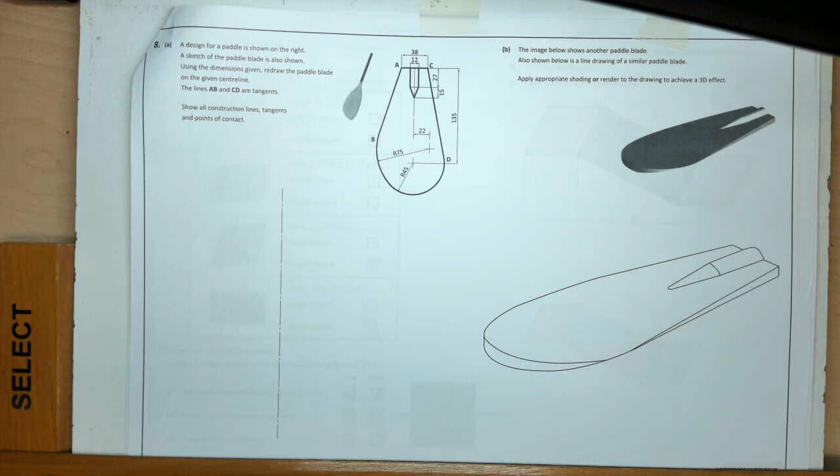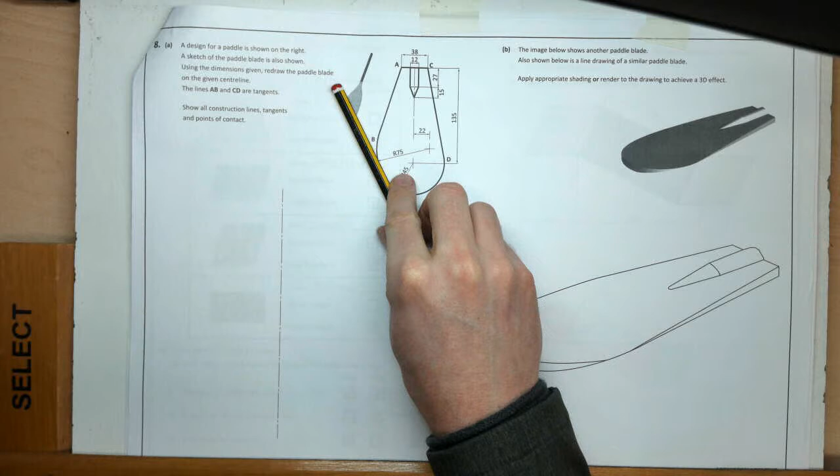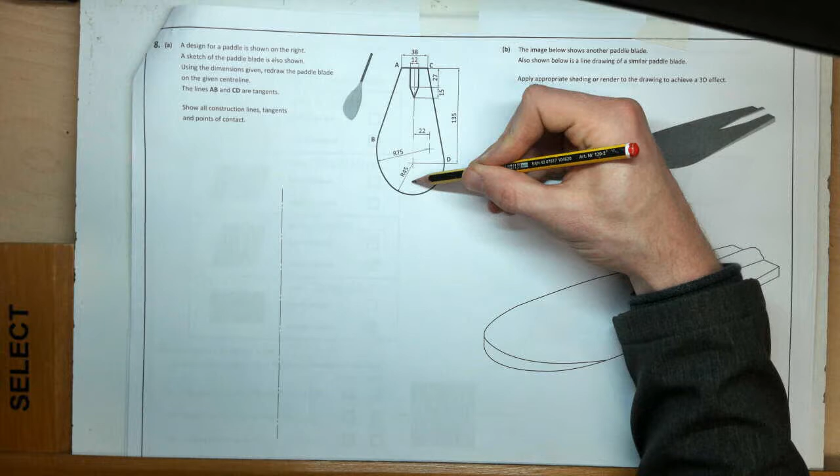Use the dimensions given and redraw the paddle blade given the center line. So here's the center line, running down along the middle here. I haven't drawn it fully there, but that's it running down along the middle. I'll just zoom in so we can go through this question together.

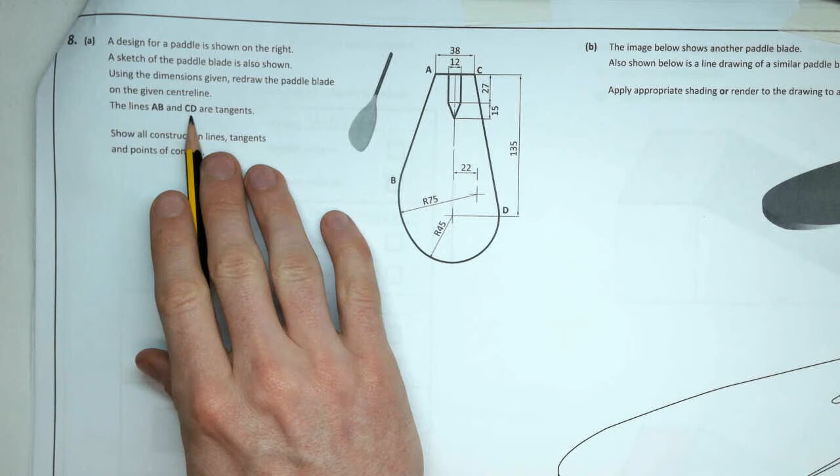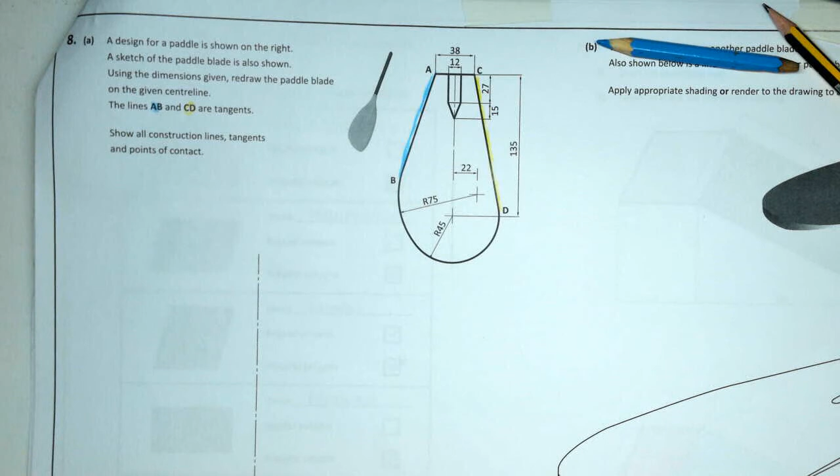Okay, and the lines A, B, and C, D are tangents. I like to highlight these. So A, B, here's A, B, that is a tangent, and C, D is also a tangent. So I'm going to need to do a construction for that. Show all construction lines, tangents, and points of contact. So what I like to do with these questions is draw everything I can, particularly with the centers of the circles, and they always are a great start. And then any constructions I can do after.

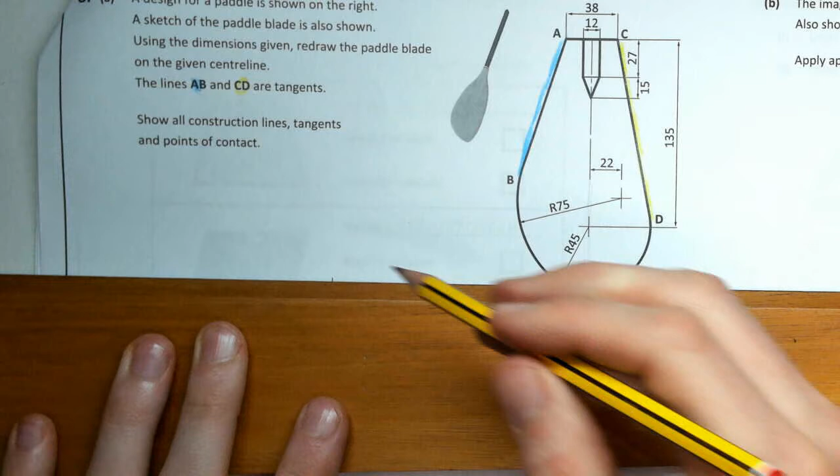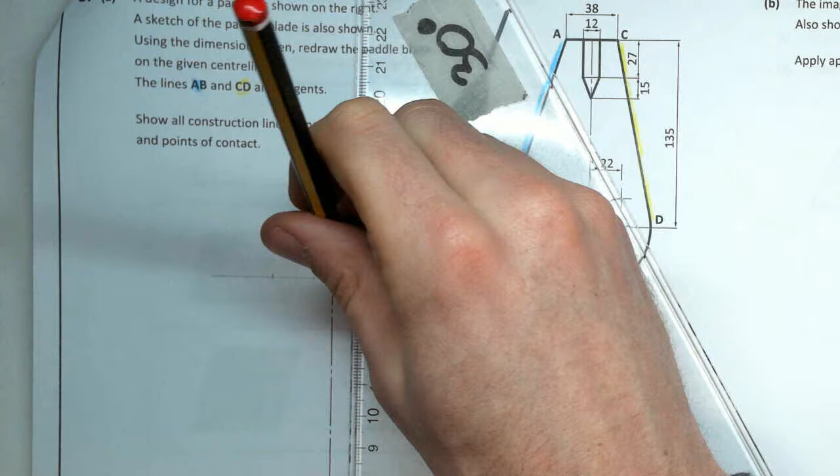So starting here at the top, let me zoom in a bit. I'm just going to draw the top part here. I've got my measurements 12, so 6 on either side, and 38, which is going to be 19 on either side. And I can project that down, so that's going to be a little center bit, and draw this edge heavy. And here's A, and here's C.

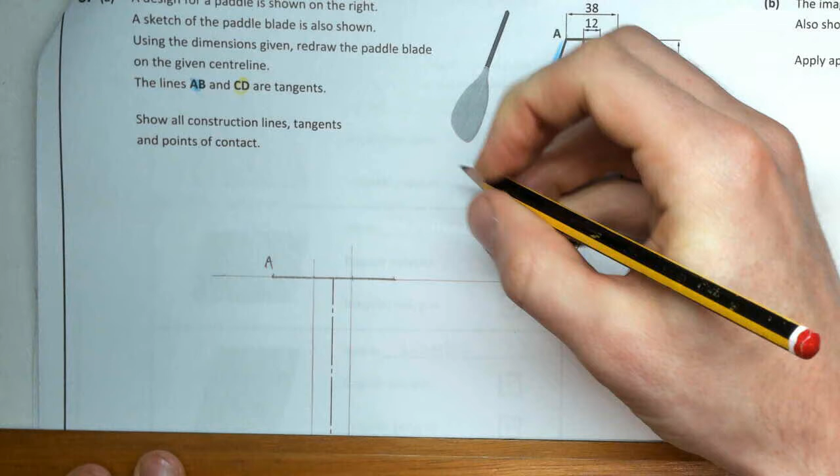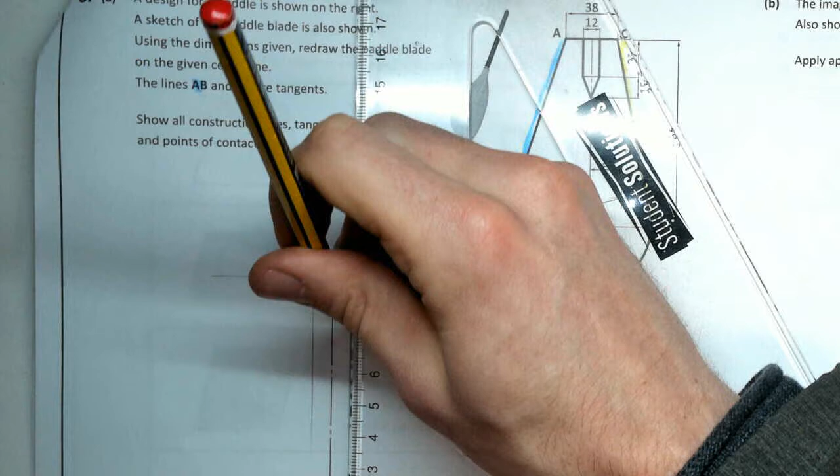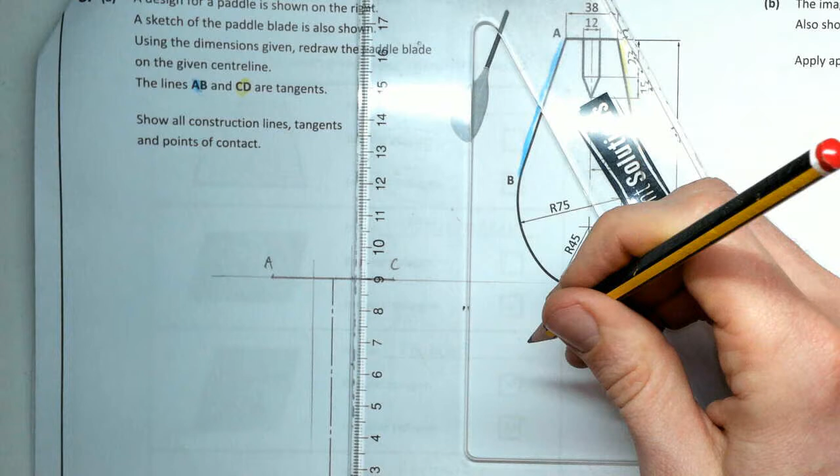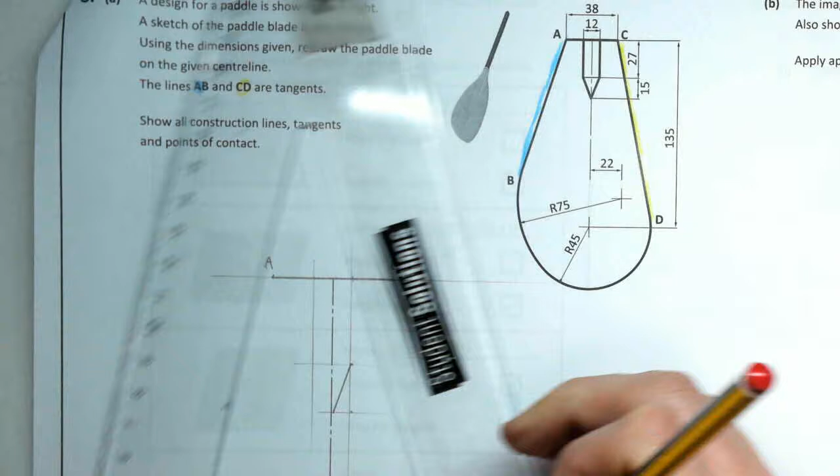Okay, so then I come down 27, 15, and that will allow me to draw that shape, 27, and 15. Okay, so just heavy in the lines that need to be heavy.

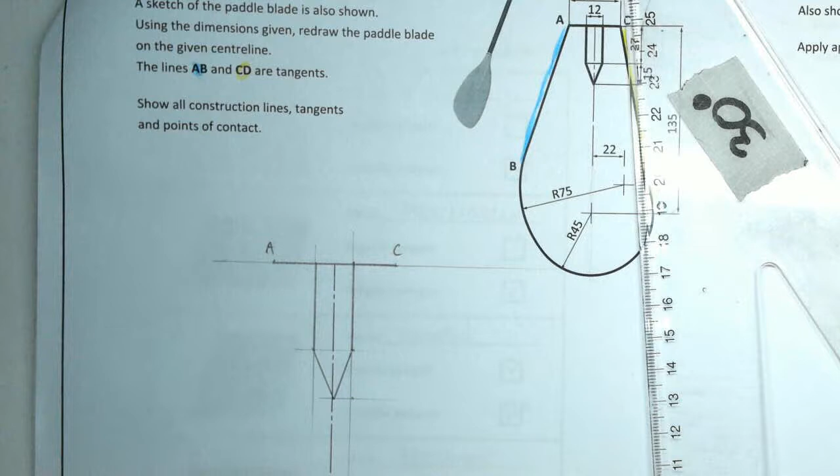Alright, and then we'll measure down our 135 to find our center of that radius 45. I'll zoom out here again so you can see everything I'm doing. So 135. That is radius 45.

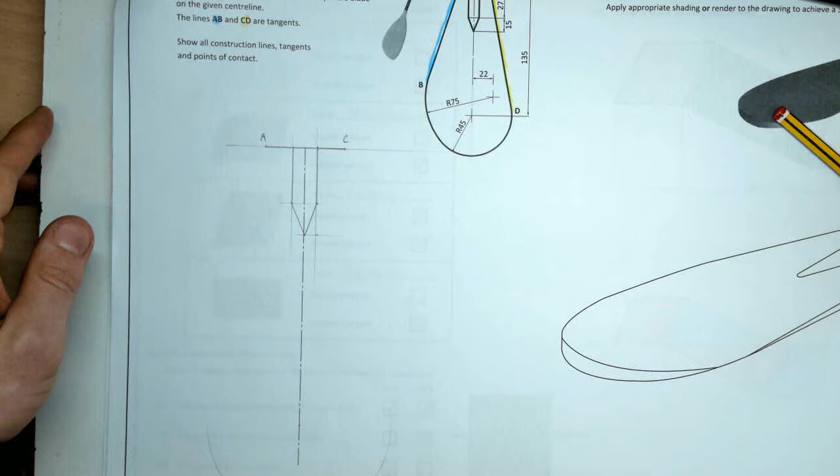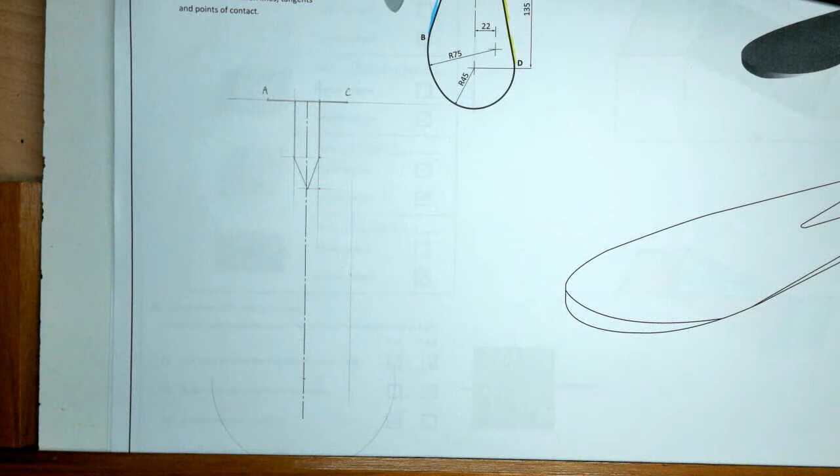Okay, and we've also got this out 22, radius 75. I'll just measure out to 22 first. So it's going to be somewhere along here. So they're not very clear in the drawing here, but this arc runs, I would say, that full length there, runs around like that there.

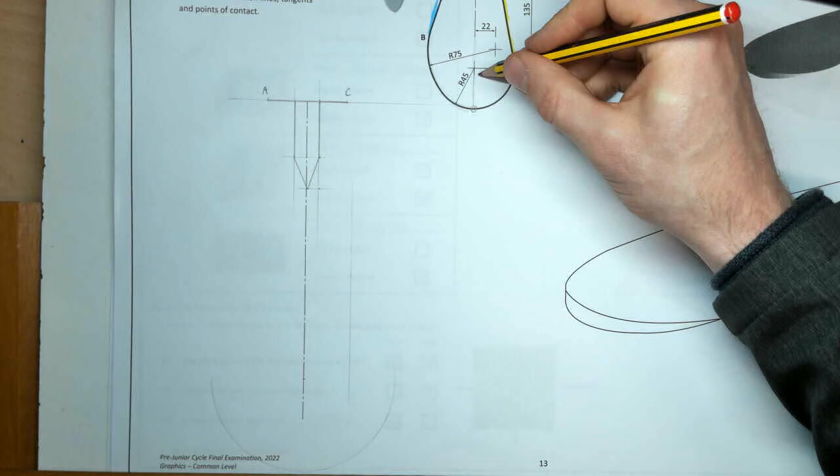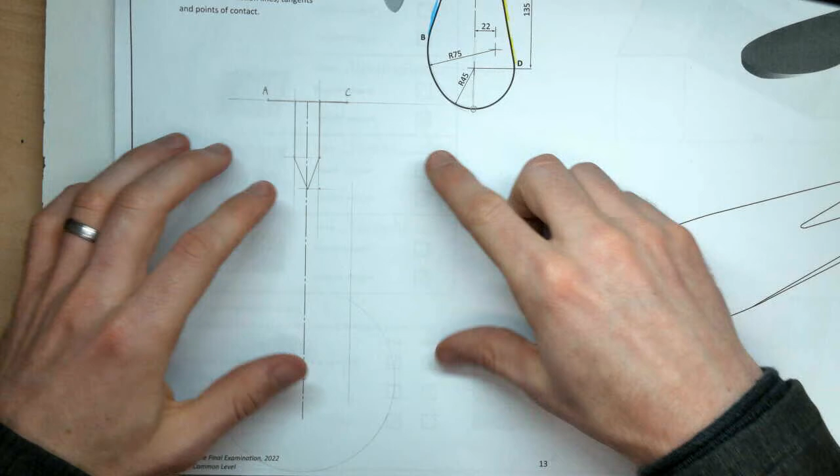So my 45, okay, so it's going somewhere along there, and just thinking, I'm probably going to need to do the construction for the tangent here. So line CD, tangent to this curve here, so I'm going to show you here.

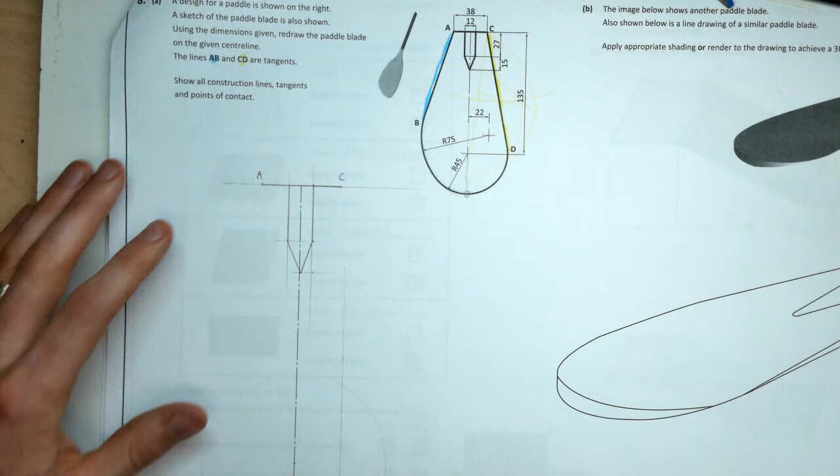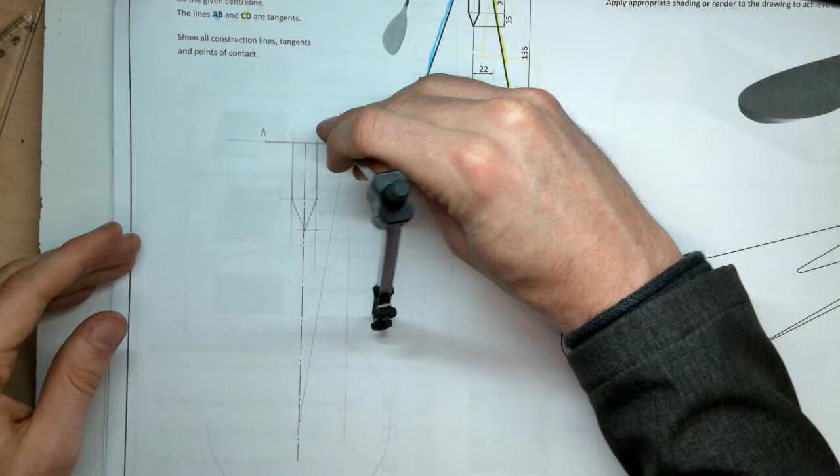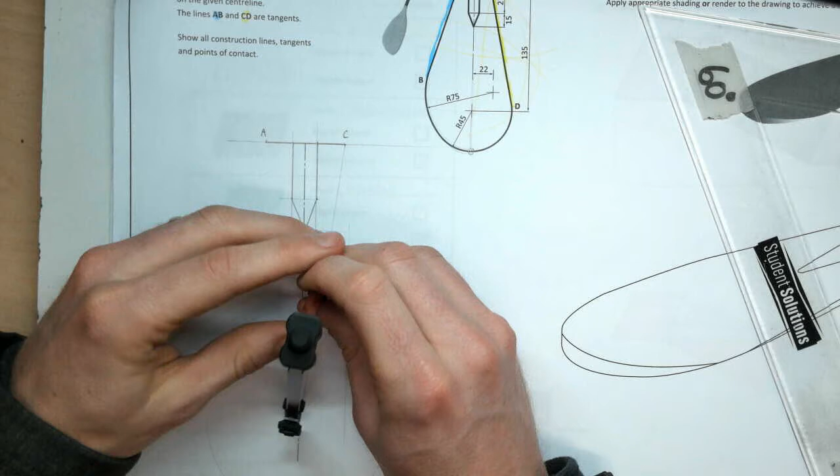I need to join C to the center and bisect that where the semicircle hits the curve. That's going to give me my point of contact. So join C to center, bisect that, and draw my semicircle. Okay, and where both of those arcs cross, that is going to give me point D. Join CD and draw that in heavy. That's my point of contact.

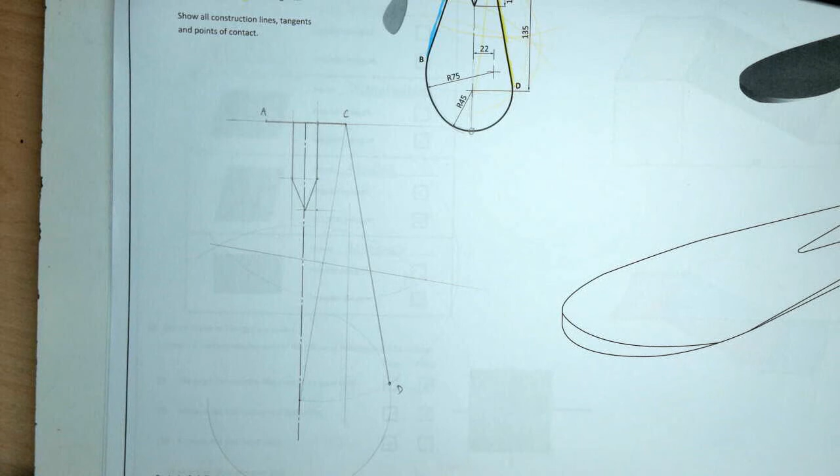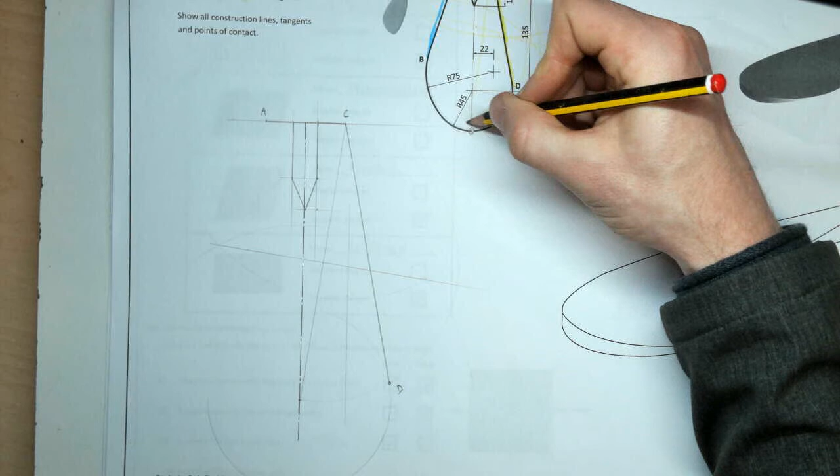Alright, so next up, I'm going to join A. I still need to find the center of that point. Like I said, I'm going to assume that this is a point on that arc. It's not very clear in what they've given us, but that's what I'm going to assume. So the distance from there to there is 75 as well.

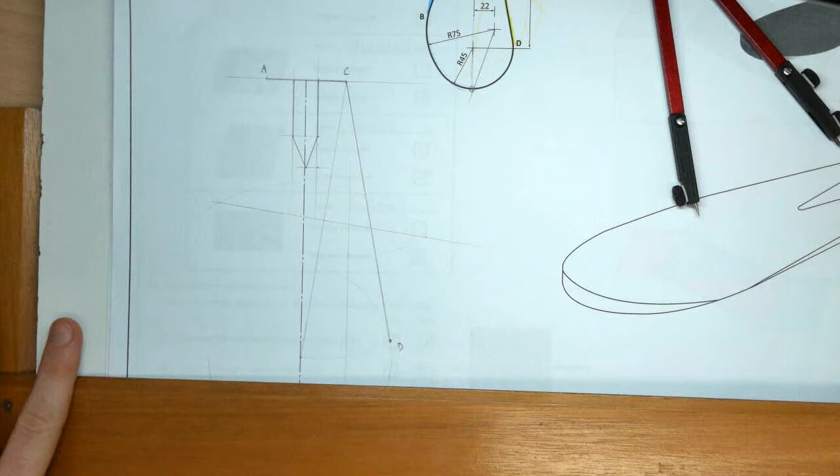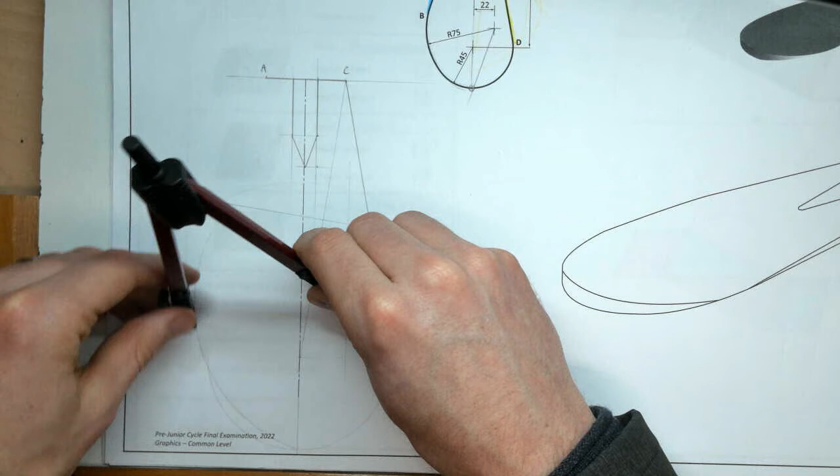So get my compass, set it to 75. Okay, so find that point I was talking about. Drop this line straight down. I got my measurement 22, stepped out here. So point of my compass down here, swing an arc. That will give me my center, and I can draw my radius here. Okay, I don't quite know where it finishes because, as we know, AB is a tangent.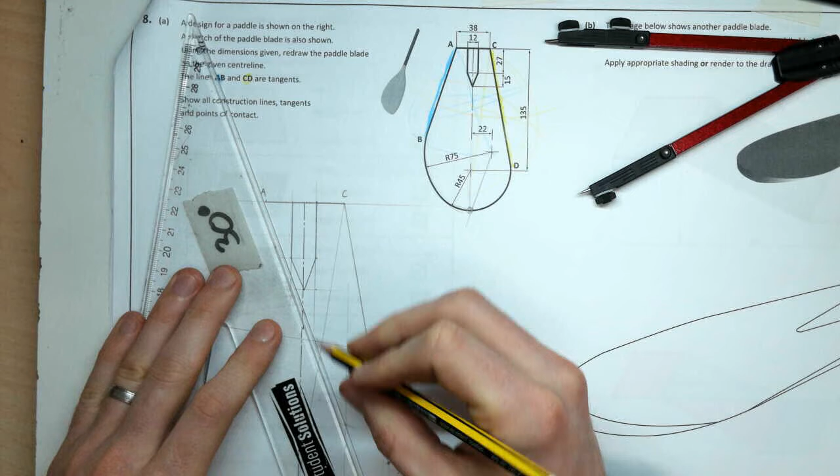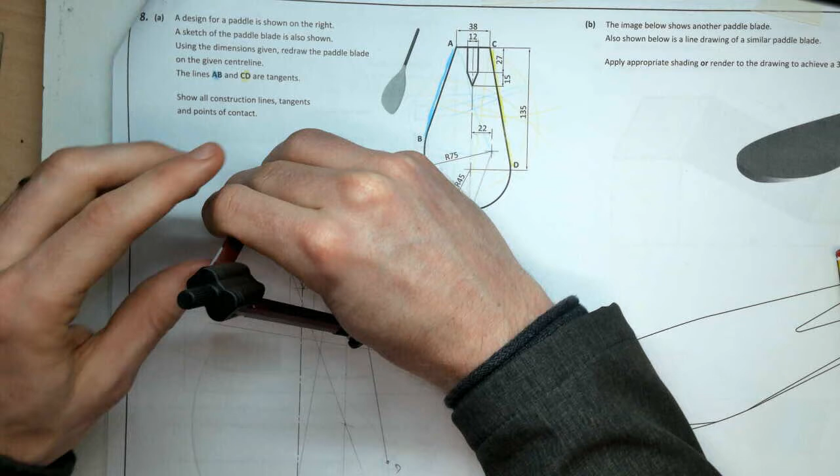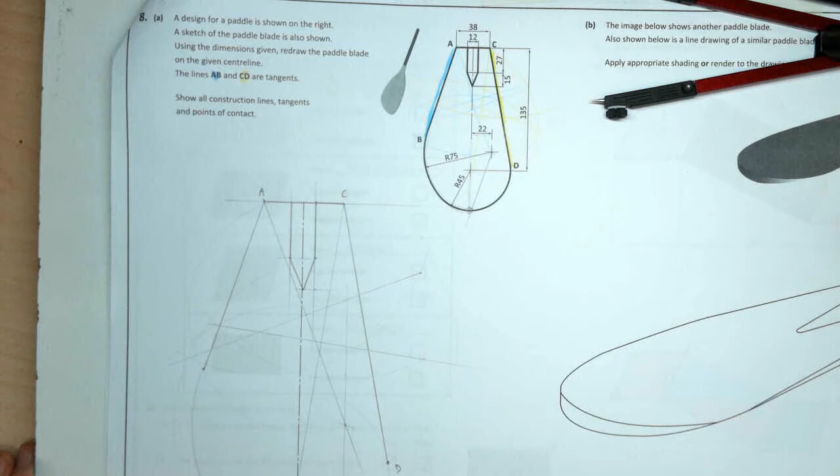So I need to do the same construction I just did. I'm going to join A to center, bisect it, draw your semicircle, and that will find your B. So very, very quickly, into center, bisect it, now draw my semicircle, and where that crosses the arc, join that back to A. Okay, so you can see there the outline, and don't forget to label B, and it's a POC, and this is a POC. Is there anything that's missing from that drawing?

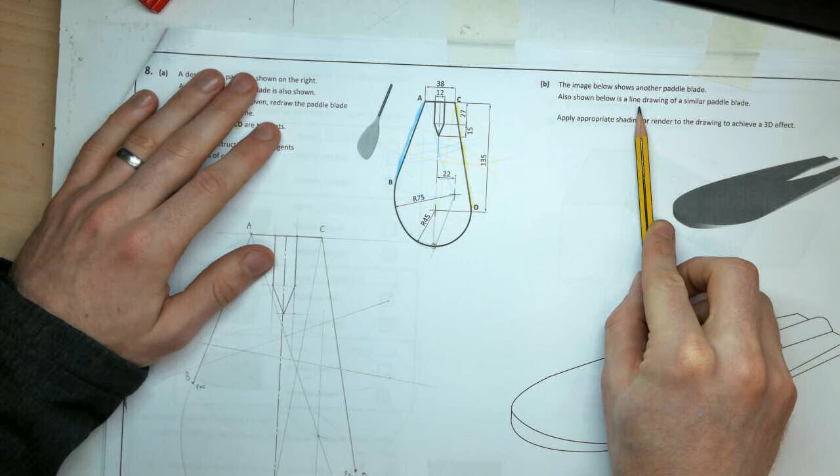No. Okay, so that is question A, and then finally we've got the image below shows a paddle boat, another paddle blade, also shown below is a line drawing, and they want you to apply shading or rendering. Do that to the best of your ability, and don't just rush through it. Think of your strokes and your tone. Okay, so that is all. That's the final question on that paper.